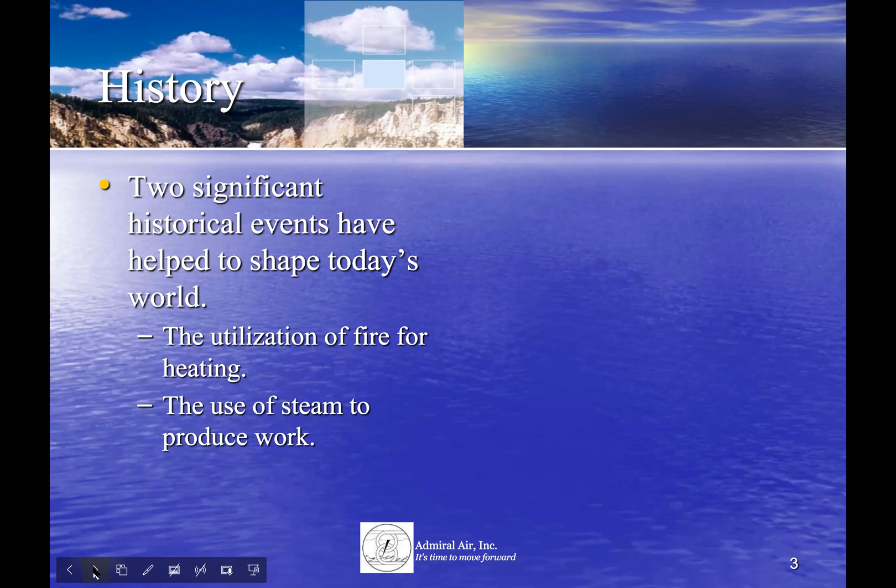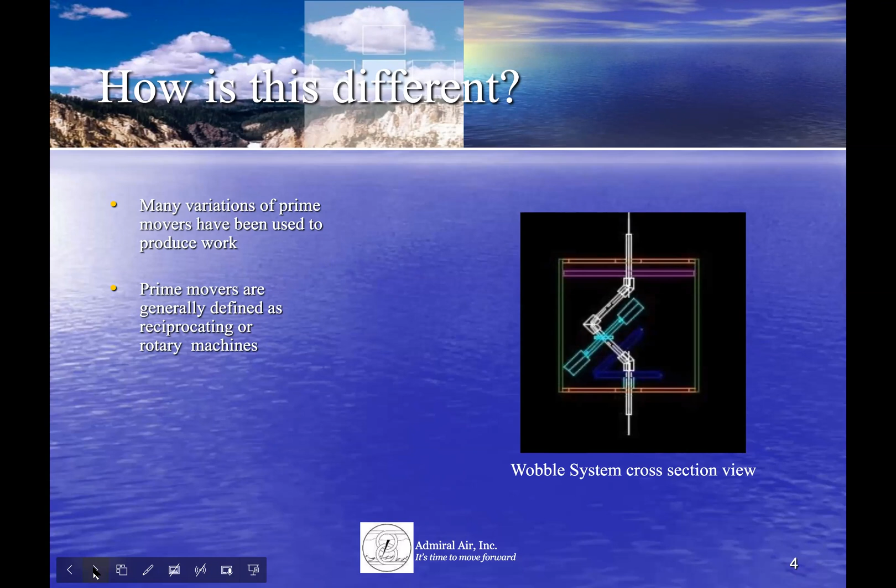How is this system different? There are many variations of prime movers that have been used to produce work, and prime movers are generally defined as reciprocating or rotary machines. The wobble system prime mover translates the wobbling motion of a disc to rotary motion in its drive shaft.

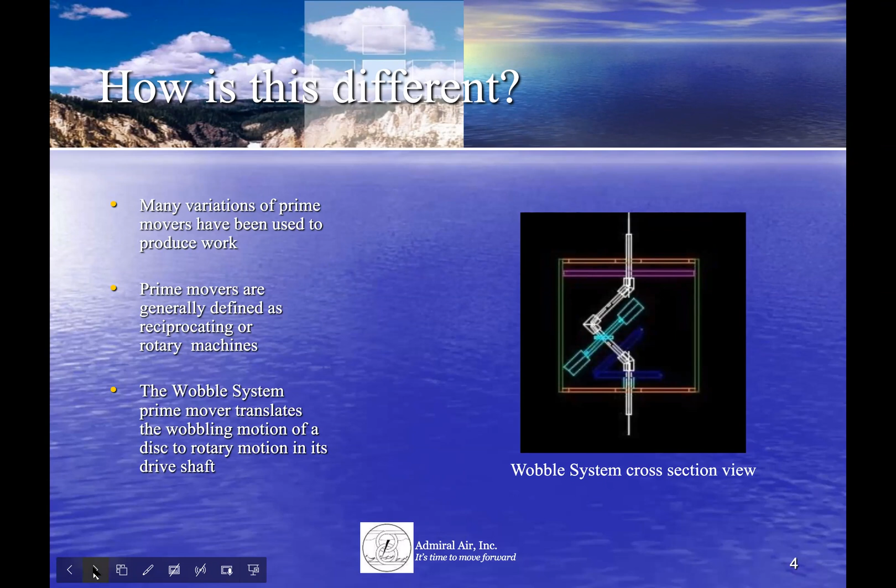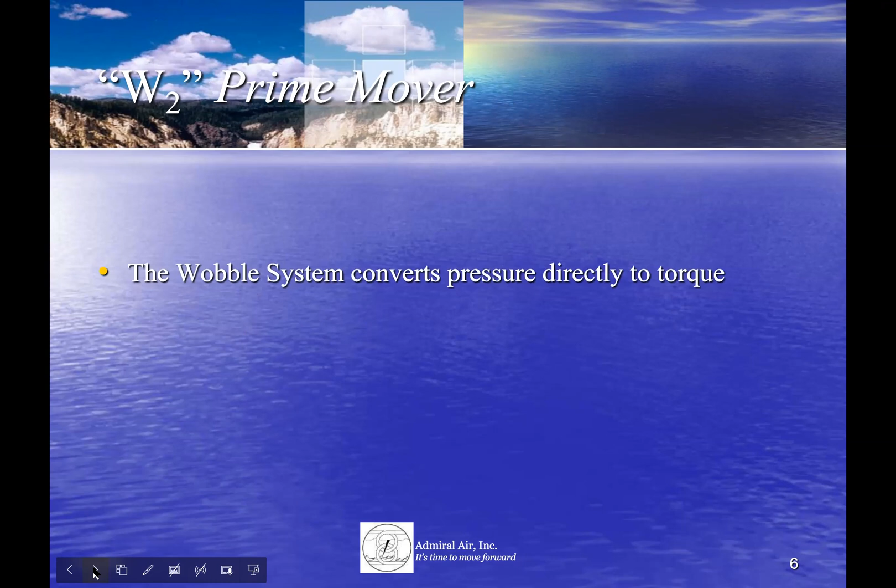The wobble system is activated by any flowing liquid or gas. The wobble system converts pressure directly to torque. Liquid or gas flows only at the rate that is required to produce torque requirements for the application.

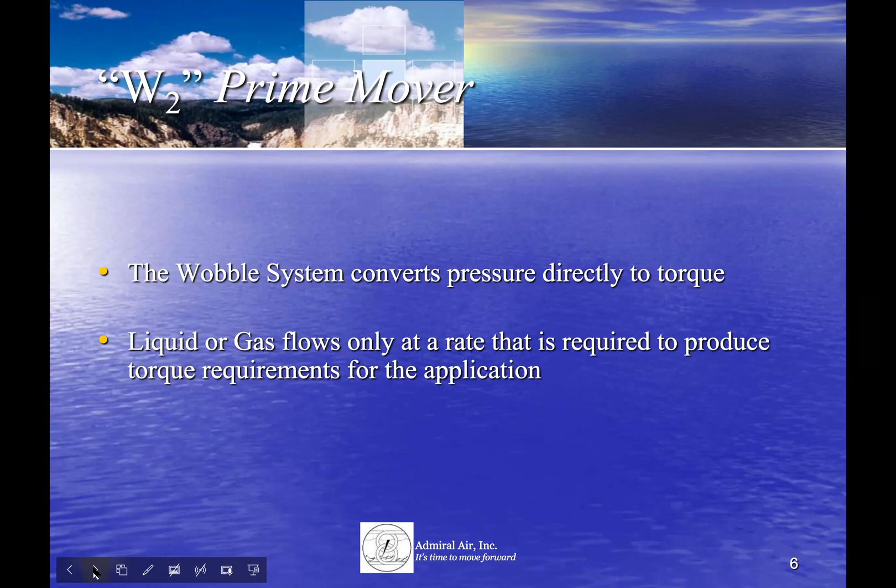We started with a clean slate, disregarded existing designs, envisioned a design that was innovative yet simple in concept. The new concept motor requirements were to result with a shaft having high torque values, reduce the basic energy input requirements, reduce the number of auxiliary systems, and generate less environmental pollutants. Create opportunity for carbon offsets.

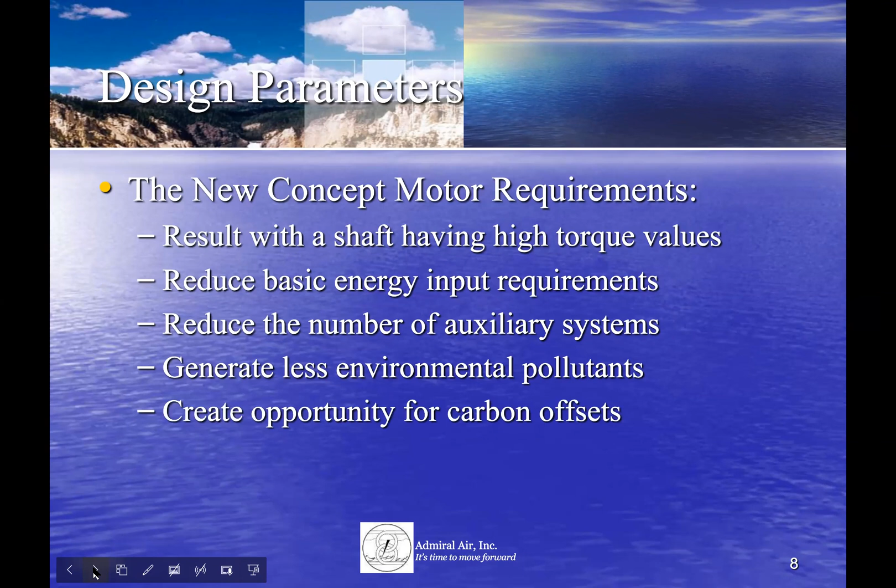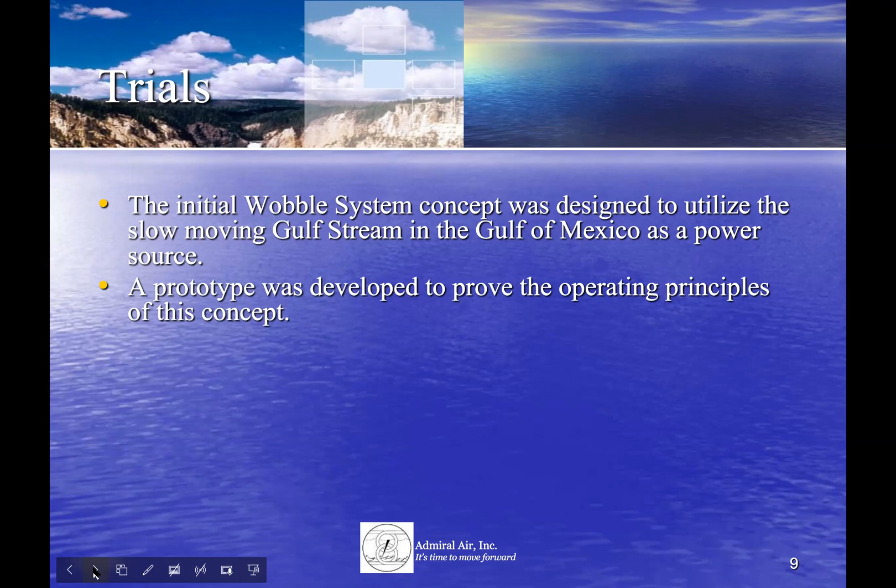The initial wobble system concept was designed to utilize the slow-moving Gulf Stream in the Gulf of Mexico as a power source. A prototype was developed to prove the operating principles of this concept. The prototype was tested in Galveston Bay here in Texas, attached to a pontoon boat which moves slowly, simulating the Gulf Stream water movement. The Galveston Bay trials produced encouraging results, which illustrated the design concept was workable.

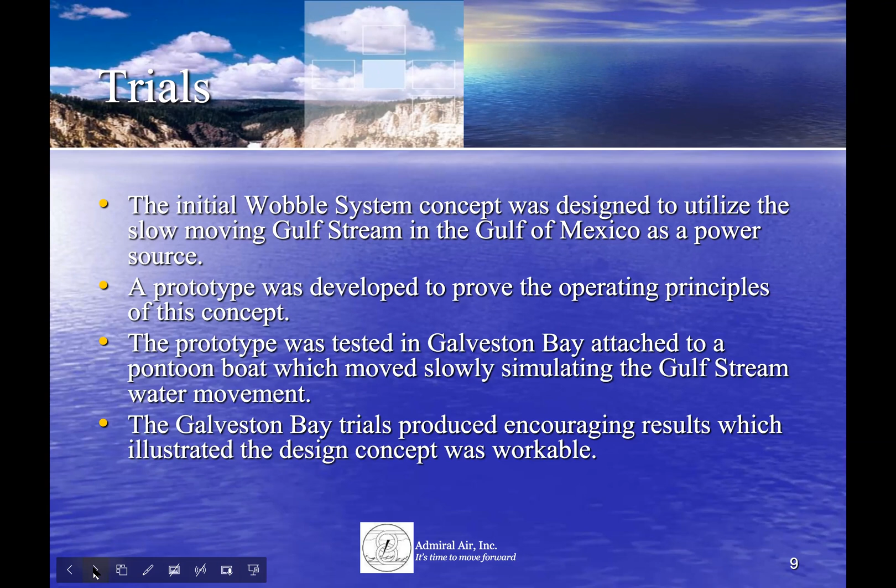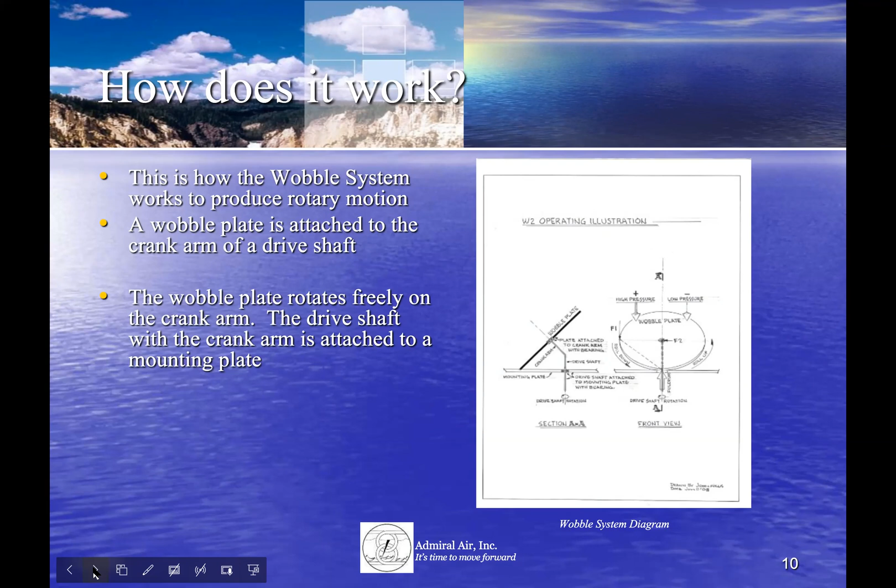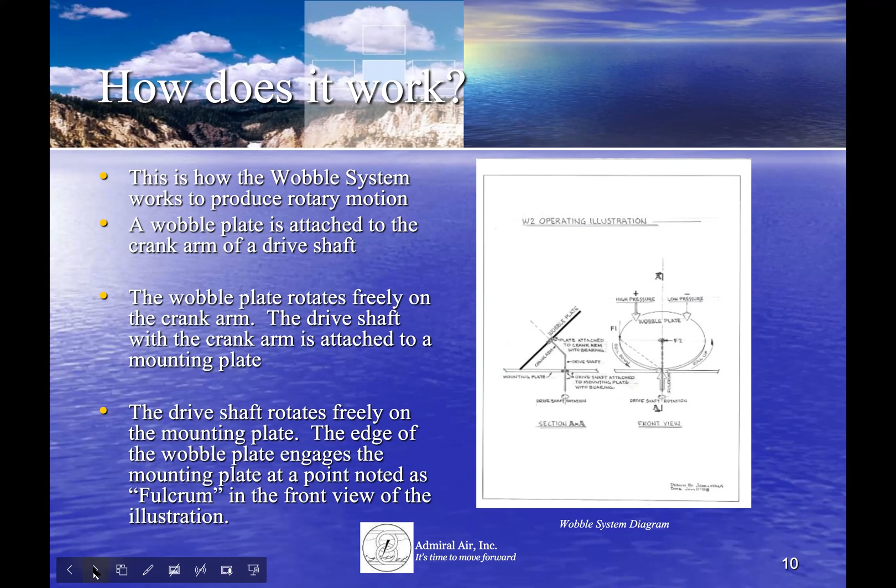This is how the wobble system works to produce rotary motion. A wobble plate is attached to the crank arm of a drive shaft. The wobble plate rotates freely on the crank arm. The drive shaft with the crank arm is attached to a mounting plate. The drive shaft rotates freely on the mounting plate. The edge of the wobble plate engages the mounting plate at a point noted as fulcrum in the front view of the illustration.

Applying a force in the downward direction as shown in F1 will result in a lateral force at F2 against the crank arm. The wobble plate will roll down toward the mounting plate at the F1 location. This action forces the crank arm to move and drive shaft to rotate in the direction of the wobble plate. The wobble system is designed so that relatively high pressure liquid or vapor is continually applied to the F1 side of the wobble plate, resulting in a continuous rotating of the drive shaft.

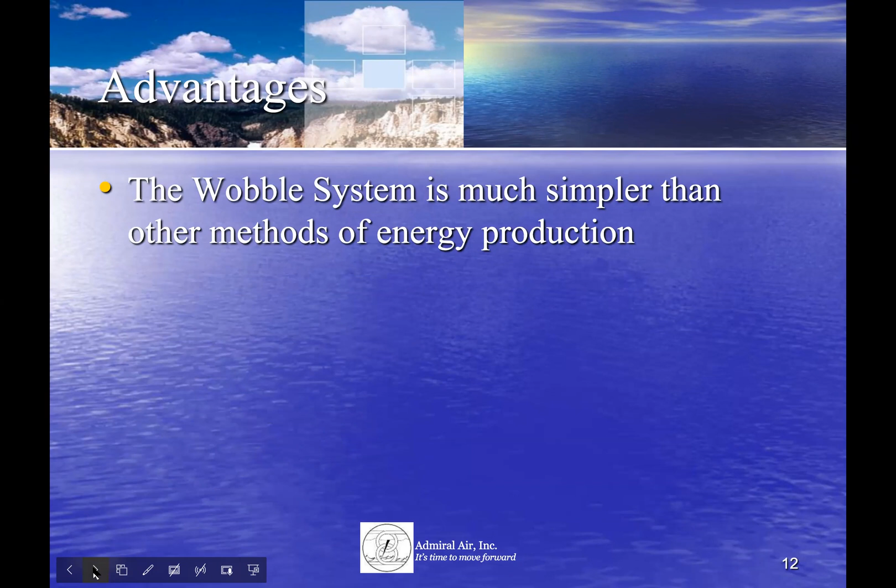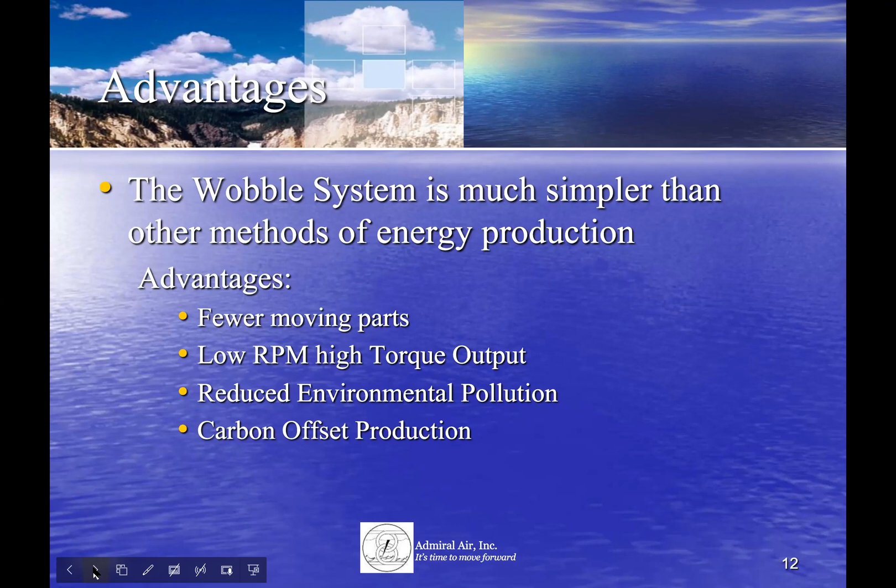The wobble system is much simpler than other methods of energy production. The advantages of this are fewer moving parts, low RPM and high torque output, reduced environmental pollution, carbon offset production.

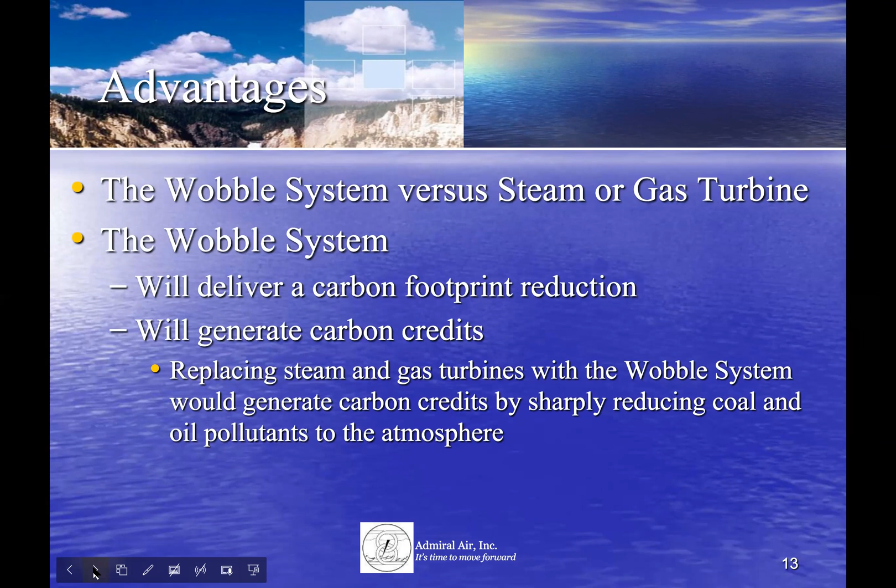The Wobble system versus steam or gas turbine. The Wobble system will deliver a carbon footprint reduction over the steam or gas turbine. It will generate carbon credits. Replacing steam and gas turbines with the Wobble system would generate carbon credits by sharply reducing coal and oil pollutants to the atmosphere.

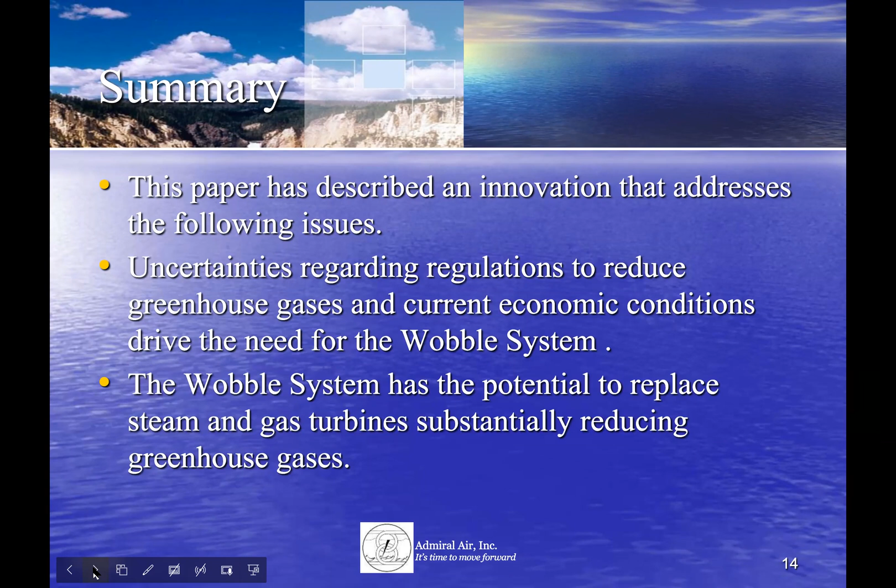This paper has described an innovation that addresses the following issues. Uncertainties regarding regulations to reduce greenhouse gases and current economic conditions drive the need for the Wobble system. The Wobble system has the potential to replace steam and gas turbines, substantially reducing greenhouse gases.

Okay. Okay. Is that the end? That's it. Okay. Well, hey, thank you for sharing that with us.